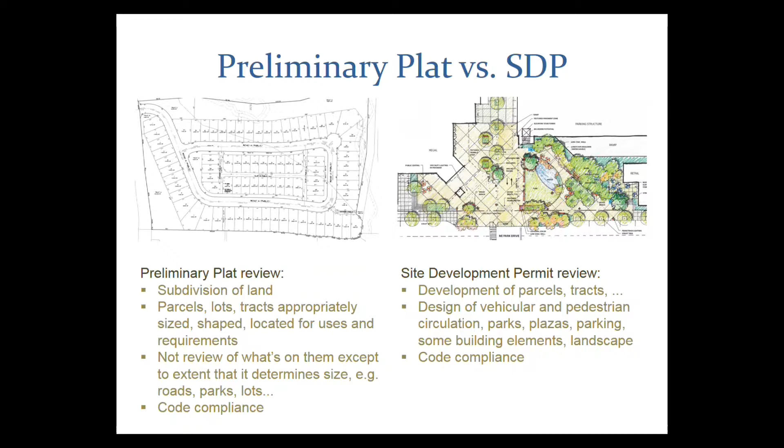That's probably your most important role because that is a more subjective decision, and so we're looking for community input on that. Usually we can tell if something is five - that was a joke.

Okay, so public hearing on the Westridge North preliminary plat, PP 17-00004. Let me get you oriented to begin with.

The subject property is here. Then around that, there is Shelter Holdings owns this kind of reverse L. The neighborhood to the west is called West Highlands Park. All the areas sort of in between that, including the subject property, are called Westridge properties. They're all owned by Polygon, including Westridge South, which you reviewed a couple of years ago.

Swedish Hospital, which has a separate development agreement, is down here - they own about 27 acres. Grand Ridge Plaza is up here, Park and Ride, and then along the western edge of the subject property and Westridge properties is the Lakeside Gravel Pit, and they have a separate development agreement, which, if you read the staff report, comes into play in some of the things we're reviewing this evening.

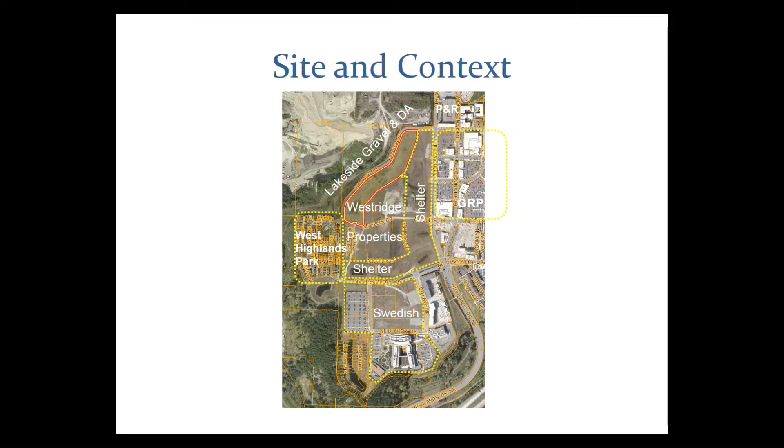And by the way, feel free to interrupt me with questions as we go along - you don't have to wait till the end. So I took some pictures in the immediate area.

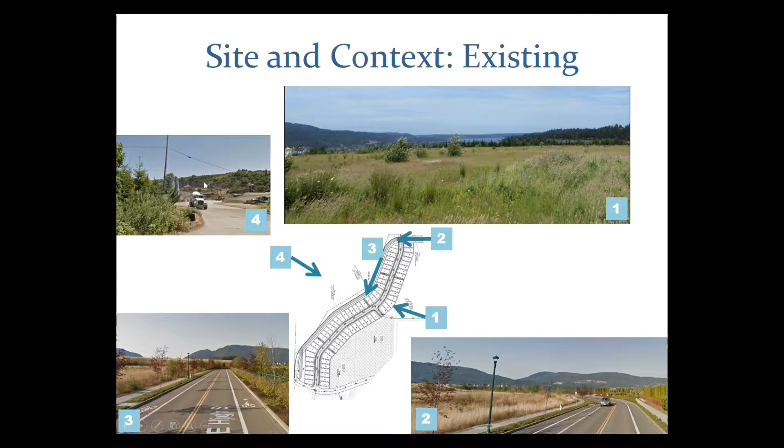The Plat is almost 9 acres, 73 single-family lots, and 8 tracts. The tracts serve a number of different purposes. There are 2 recreation tracts, one at the north and one at the south. There are several east-west trail connections, which also are in separate tracts.

There are little pieces down here at the south end. This one is in a separate tract. This one is not in a labeled tract, so that was one of the conditions, saying that that small area either needed to be incorporated into the adjacent lot or given a tract name and size as part of the final plat.

As you have read, High Street is being proposed for conversion to a multi-use trail with recreational facilities and an overlook along it. The neighborhood is identified as a house and garden neighborhood type, which helps orient you towards the design guidelines that apply. At this point, we're only looking at things like circulation and lot configuration being impacted by house and garden.

It will also be guiding us with landscape design review in the future. And then on the ARC, the Architectural Review Committee side, this also results in a specific set of architectural standards that are applied to the project.

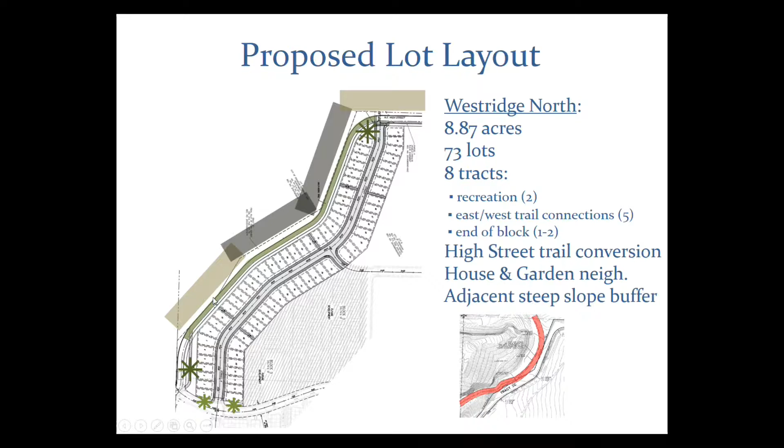The street system: the proposed street system is Street A, which is parallel to High Street. There are several streets that are being proposed to connect into the plat. Federal is being extended to connect into the Plat with the Plat building a stub, and Ellis has been extended through another project to the south. This southern portion is what remains of High Street as a vehicular road.

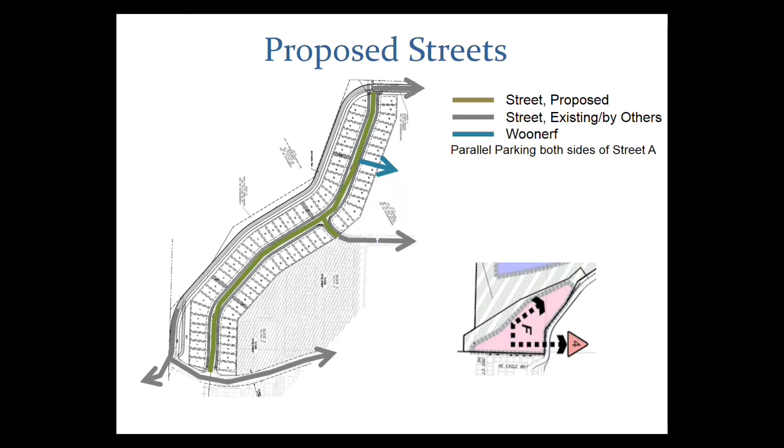The main street is proposed to have parking on both sides, and staff have identified that some kind of circulation facility is needed here, and after talking with the applicant, we have proposed a woonerf. I'll talk about that a little bit more in a moment.

There's certainly been a lot of discussion about this change of making High Street into a shared use or a multi-use trail. So I think it's important to look at the bigger context to set the framework for why the city was willing to support this proposal. Currently, High Street is the northern connection into West Highlands Park, and Discovery Drive is the southern connection.

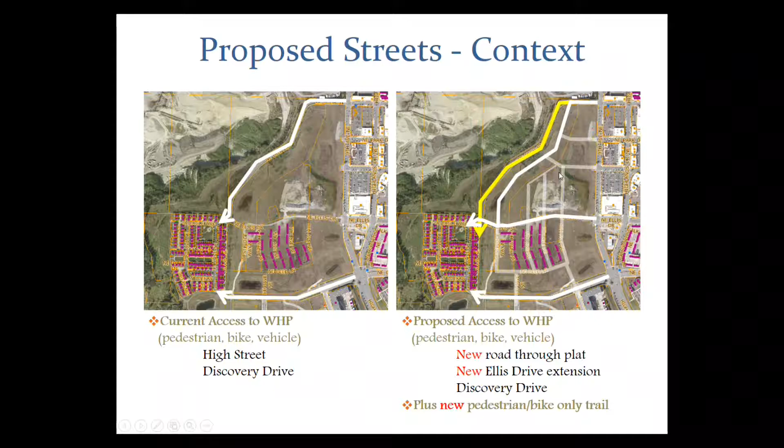As Westridge and the Shelter Holdings properties build out, there will be a significantly more complete network. Specifically in relationship to this plat, there will be Street A, which parallels High Street and replaces that connection, and Ellis Drive is being extended. So while we have one northern street right now, after construction, there will be two streets into that, as well as the ped bike corridor shown in yellow, which would no longer include vehicles.

So what is a woonerf? A woonerf is a Dutch term for a shared pedestrian vehicular corridor. We have a lot of them in Issaquah Highlands, Talus, all through our urban villages.

In looking at the grades, the street connections, and the existing street grid, we had initially spoken with Polygon and considered not having this street connection. However, as we began to see the final grades as part of the plat, we felt that one of the premises of Issaquah Highlands is an interconnected street grid network, and that we don't use dead-end streets unless there's some reason we can't bring the street through—topography, the edge of the project, or a critical area—but that wasn't the case with any of these.

So we worked with them to identify this, and you can see here is where Park Drive would have dead-ended without that.

To give you a sense of what this woonerf might look like, I identified Heron Lane, which is the continuation of the road that comes out of Central Park on the east side. It is a woonerf as well, however it's only 18 feet from edge to edge, while we're proposing 20 feet. One side has a similar shallow landscape area. The difference is Heron Lane is about 240 feet long, while the one we're proposing would be 80 to 100 feet long, so a third to half as long.

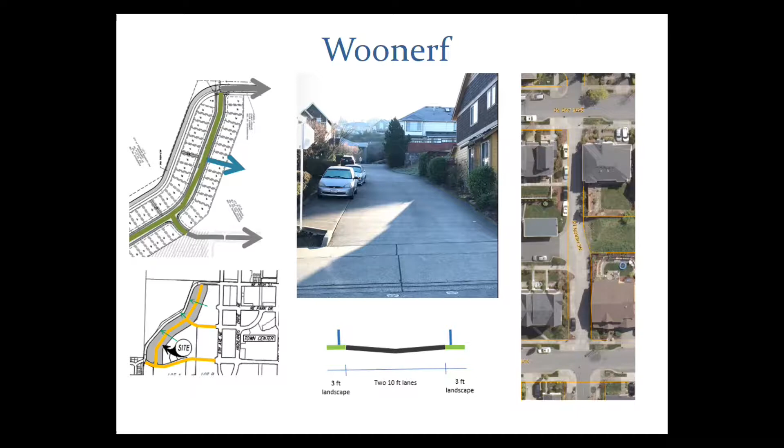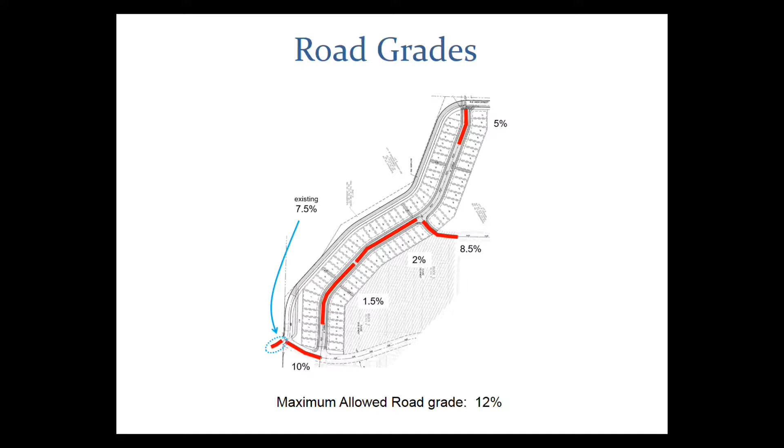Road grades - we've gotten some questions from the public about this. The existing exit right now is about 7.5%. The proposed connection heading east, Ellis Drive, would be approximately 10%. Federal would be approximately 8.5%. Street A is fairly flat, 1 to 2% in the middle and 5% at the north end. For reference, the maximum road grade the city allows is 12%, so all the roads are comfortably under the allowable maximum.

Parking - the first thing I have to say is parking is not part of a plat review. However, I know you will ask about it. The applicant included this as part of their package, which was very helpful because it allowed us to understand how this might be laid out. That said, this is a concept - they haven't designed the houses, they are setting the lot widths, and we have some conditions around driveway widths. So you can make certain assumptions about how much parking might be on lot versus on street, but this will be finalized through the construction permit review process.

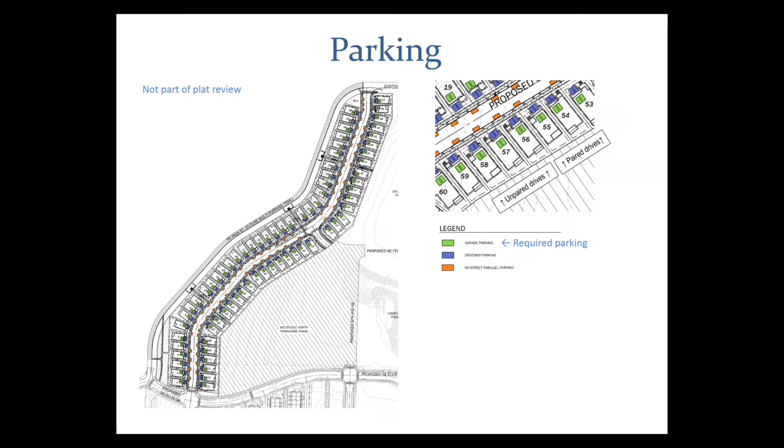Lucy? Yes, sir - what's the width of this street compared to the street it would be replacing to the west of it? It's wider. It's wider. What about if you took out the parking spaces?

I know they're proposed, but this street is not just going to get the street traffic from the homes on it, but also the additional traffic from the street to the west that it's replacing.

Let me take a minute and walk you through that. High Street is, I believe, two 9-foot lanes and two 5-foot bike lanes, so that's 28 feet. And I believe this one is 34 feet, so it's two 10-foot lanes with 7-foot parking on either side.

I would be hesitant to remove the on-street parking. I believe it's an important part of meeting the overall neighborhood need for parking. I had a resident of West Highlands Park come speak to me after Polygon's meeting with the community about some of the parking challenges West Highlands Park is facing versus how some of these other neighborhoods are designed. I do think on-street parking is important for accommodating the fluctuation of parking needs in a neighborhood.

Right, but also sight lines become more difficult when you've got the added traffic. Isn't that correct? You've got to think it's not about additional traffic, that would be about cars parked too closely to the driveway, not just the on-street parking. But it's the sight lines from the driveways out to that road.

Great, thanks. So the pedestrian network, the main pedestrian network are the sidewalks on either side of the street. There is also a series of trails associated with the Plat. Of course, one of those is High Street, which would be a multi-use trail for both pedestrians and bicyclists.

There are east-west trails proposed to break down the block size. I have a diagram about that in a moment, but these are provided to help the streets connect through. This area was originally laid out with Microsoft in anticipation of a second campus, which in the end did not happen. So we have these super blocks, which was part of their approach to laying out the area.

What we've been doing is working with applicants to create a finer-grained, interconnected street network, and where we don't have enough streets to add in trails, creating a through-block passage instead. This southern trail is a good example of that.

This is a townhouse parcel that the permit will be coming to you in the near future. They have proposed a neighborhood trail that would connect into that and continue on through the townhouse project.

We've proposed some fine-tuning to this network because it's important that as someone is walking, they have good sight lines to see where they're going. These two tracts that form this route don't line up exactly, so in the staff report we proposed a couple of different ways to do it. One would be to adjust the tracts. The other is to angle the trail through the tracts, allowing the buffer to get a little smaller on one side, but providing the full buffer overall within the tract, so it has better continuity as someone's walking through it, giving them a clearer picture.

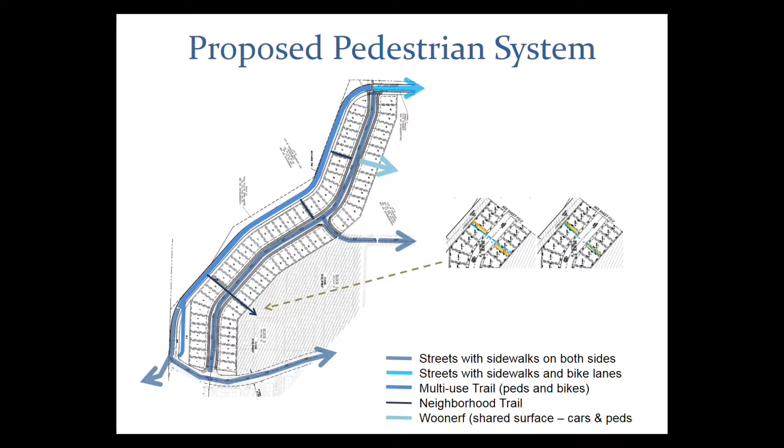Right, no, I appreciate all of that. And I think what I was thinking is, and this is what the applicant can probably address, how difficult would it be to adjust, maybe swap different lot sizes—number 27 with number 35—so those crossings match up, as opposed to trying to do an angle or wedge it in somehow. I'm just curious why that wasn't put together in the first place. I'm sure there's a reason, I'd just like to understand that. Yeah, that would be a good question for them. Thank you, they're forewarned.

I think one of the other things important to look at is the overall pedestrian and, to some extent, bike network proposed between 9th Avenue and 6th Avenue, because in making High Street this multi-use corridor, I think it shows we're really completing a network. We had originally required Microsoft to provide this trail along this edge, and when they went away, we still were building out other parts of it and waiting to see what would happen in this area. So when this was proposed by the applicant, it seemed like a great opportunity to complete that network.

So that we have a variety of kinds of pedestrian and bicycle facilities. Some people, especially commuting bicyclists, are most comfortable riding in the street, taking a lane. Recreational cyclists, people cycling with children, are not necessarily going to be comfortable in those circumstances. Some people are interested in a certain length of ride or a certain character of ride. Some people want to walk or bike in very direct routes. So we're really trying to provide for a variety of different pathways. What you can see is what we're anticipating—we don't have all these pieces in place yet, but from our discussions so far, we see we'd be able to have this as a segregated corridor, with a variety of different kinds of trail facilities on different kinds of streets depending on the user, and again a segregated trail that takes you down to the valley floor.

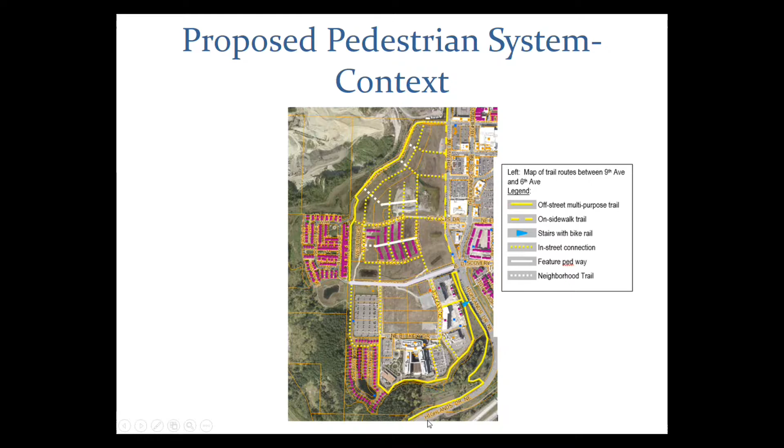Block length, we always talk about that with you guys. I think we've gotten a really good length. We do have a kind of longer length right here, but we felt that between the streets and the trail corridors proposed, overall we're getting a good network set up.

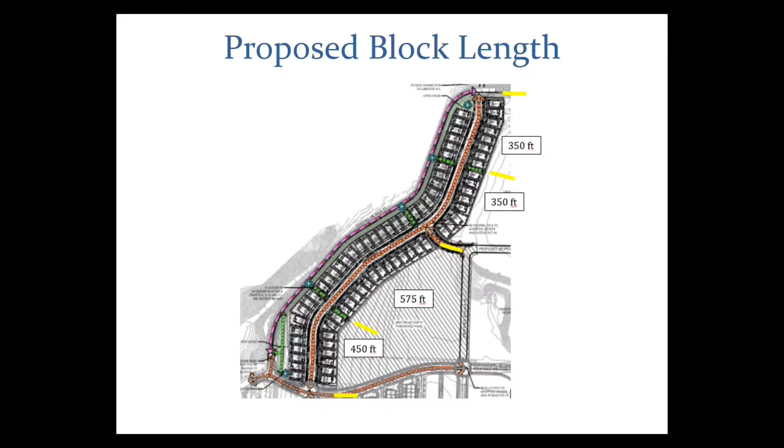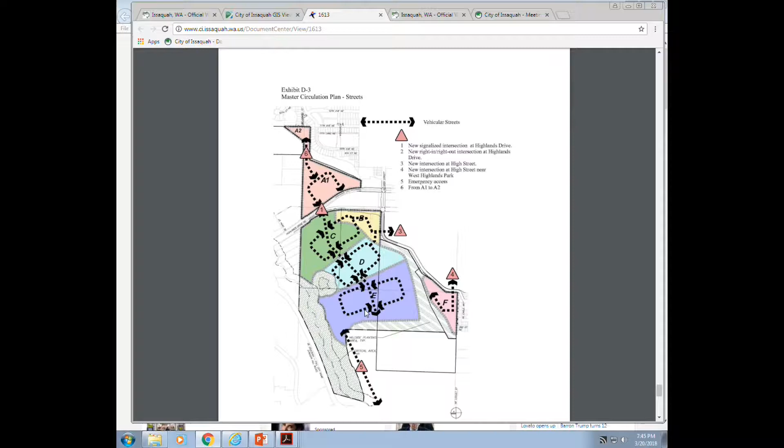So Lucy, can I ask a question on that? You know how we have some standard for when it's a public-facing structure, it's got to have some appeal. What happens on the back side of that, particularly down there where it's facing that other development?

So there is a condition, our standard condition. It's condition number 30, so you can look at it and see if you think it's sufficient. It has an average building height limit, requires articulation of those facades, and requires that there not be bright colors on those sides. So we're trying to make the buildings more interesting and yet not stand out or show up from a distance.

And does the same standard apply to the development going in down in that pocket, to the lakeside? I don't know, I'd have to look at the development agreement. I haven't read it in a long time. That's an interesting question, a good one. Hadn't thought of that. Will do.

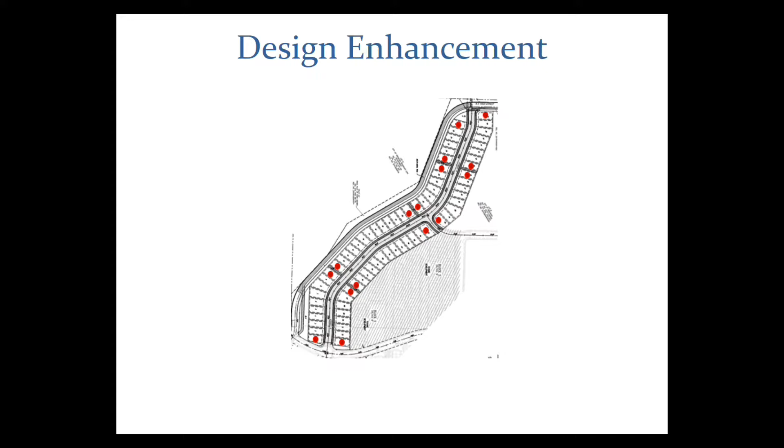There were a bunch of easement conditions. I'm not going to read through them like we have in the past, we've stopped doing that. So I'm just going through the images and things we called out in the staff report, and you're welcome to ask me questions about any conditions. I just wanted to explain 3 of the easement conditions, because some of them are kind of wonky.

Probably the easiest one is number 3, where Street A meets Ellis. This little tract on the end of that block, because of the way the road is curving, will have a sight distance easement to ensure there's a clear zone so drivers can see each other at or approaching that intersection.

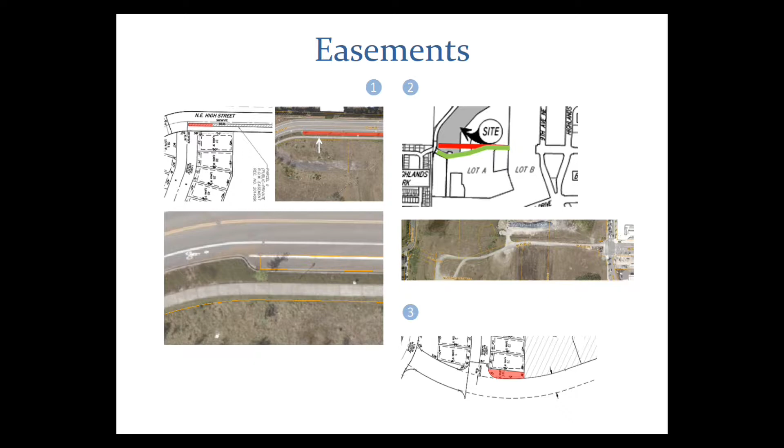That's it. Great. So, do you have any questions for Lucy? I'd like to hear the applicant presentation, but any questions you have right now, welcome to throw out there. I don't, with this. Okay, thank you, Lucy.

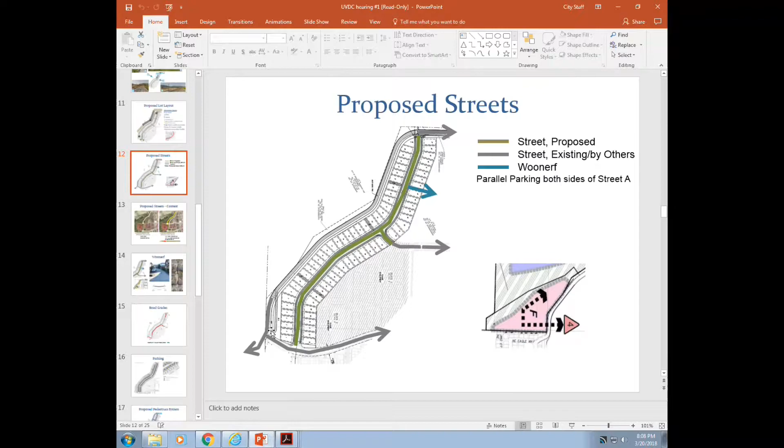Okay, thank you. Sorry, guys, anything from any of you? No? Okay, thank you, David. Richard, are we going to take a look at that?

Welcome back. I'm thinking that they want a better...

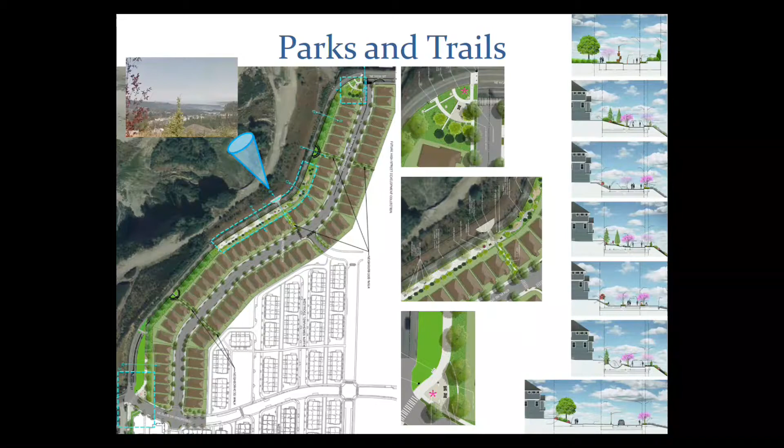Thank you. And if you could provide some clarification as well, because I'm not clear on it - the park space or open space required for this development, is the vacated or imagined High Street part of that requirement in terms of square footage or amount needed?

So there isn't a square footage requirement. You probably remember, having been on the commission a long time, that to provide guidance to the commissioners, we've surveyed the average size of a lot of these different facilities per household, and this is certainly consistent with that. It does take into account both the park-ish spaces at the north and south end, as well as the facilities along the trail, because that is a much more significant recreational facility than we've had for trails in other places.

So which leads me to the question, and forgive me if this is sensitive, but the road is owned by the city, correct? And is it being, for lack of a better term, given to the developer for this purpose? Or is there an agreement in place to purchase that space, or what's happening? How does that fit together?